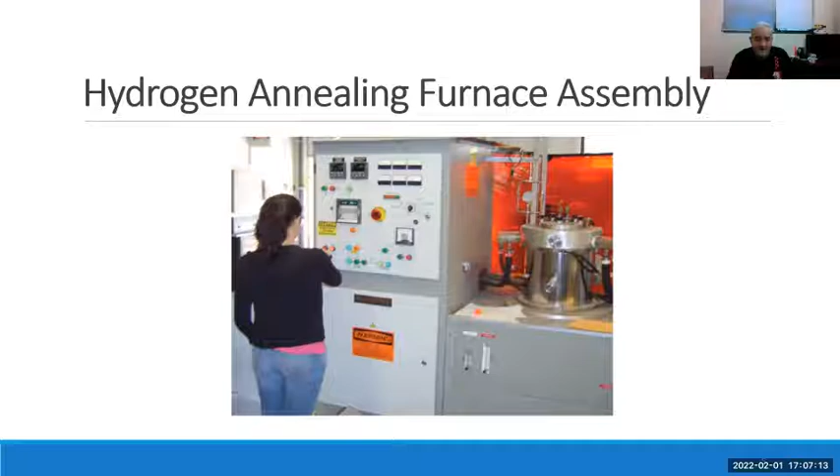And some of the equipment that we have, which I think not many universities in the world have, is a hydrogen annealing assembly. This furnace can go up to 2000 degrees centigrade, not Fahrenheit, centigrade. And we use it for annealing rhenium, which is used in rocket nozzles, and any of the expensive refractory metals which need a reducing atmosphere. So this item is not present at other universities. It might be present in industry, like the rhenium industry or other industries with high temperature applications. But I got this from the NSF, National Science Foundation, and it's a very important piece of equipment.

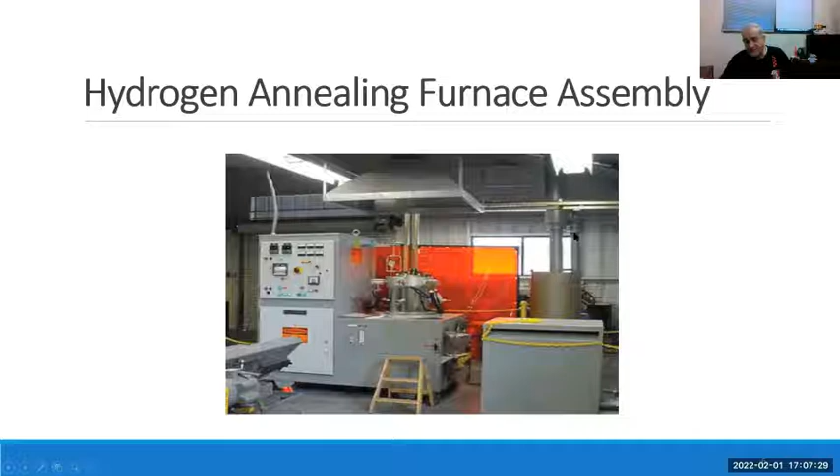This is another view of it. This is the hydrogen furnace, and these are hoods and connections. Actually, there is a small building beside the tin shed area, beside our design center, just built to operate this furnace.

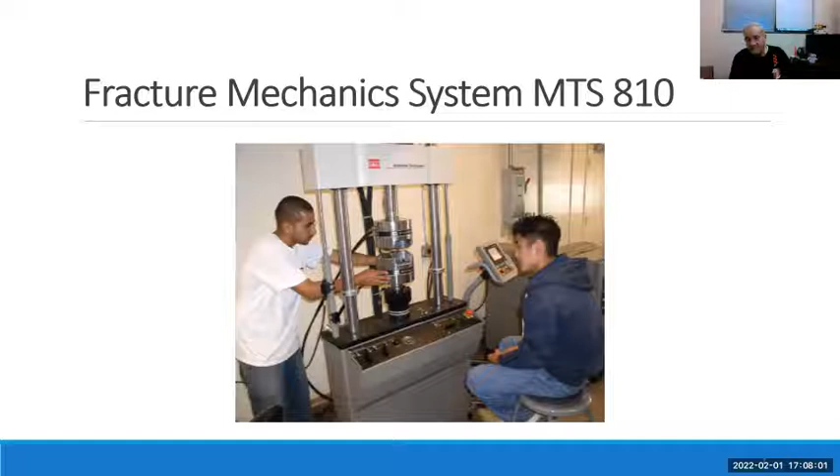Another machine I got from the National Science Foundation, which if you came and worked with us you hopefully will work on, is a fracture mechanics system. We can do here fracture toughness, high cycle fatigue, low cycle fatigue, fatigue crack propagation, stress corrosion. It's a very important machine, and we did lots of work on it, but we can still do much more work.

I published with the graduates and the undergraduates over 200 refereed journal and conference proceeding publications. I supervised over 50 MS theses in these years, and every thesis was published in a journal, except one which was published in a conference proceedings, which was refereed as well. I also delivered several keynote speeches and plenary lectures at international conferences.

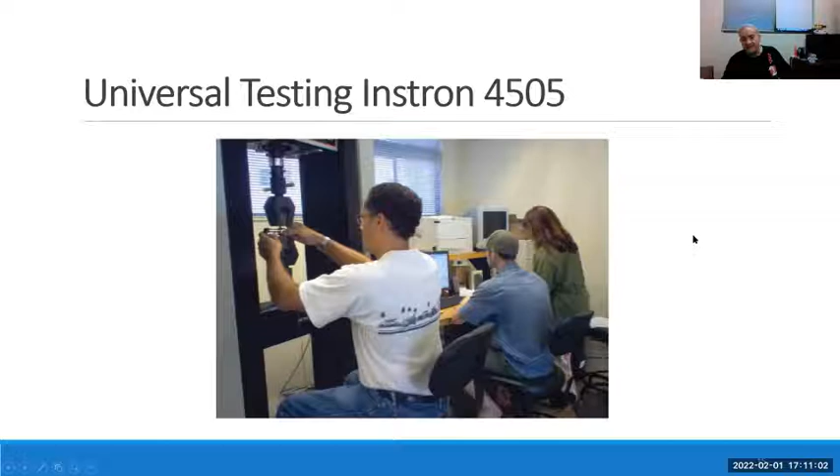This is one of the machines we got from the National Science Foundation. It's called the Universal Testing Instron 4505. It's universal because here we're doing tension. If you remove the grips, you do compression, you do 3-point bending, you do 4-point bending. So that's why we call it universal.

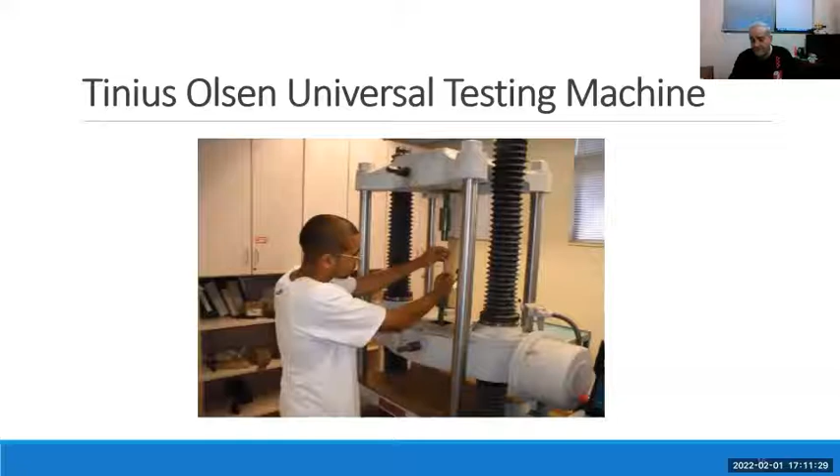This is another machine called Tinius Olsen. We use it for tension and compression, and this is for heavy duty. It has 120 kips force. The previous one has 22 kips, but this one has a 120,000 pounds capability. This is another one with 22 kips. We got it as a donation from Aerospace Corporation. We use it for composites.

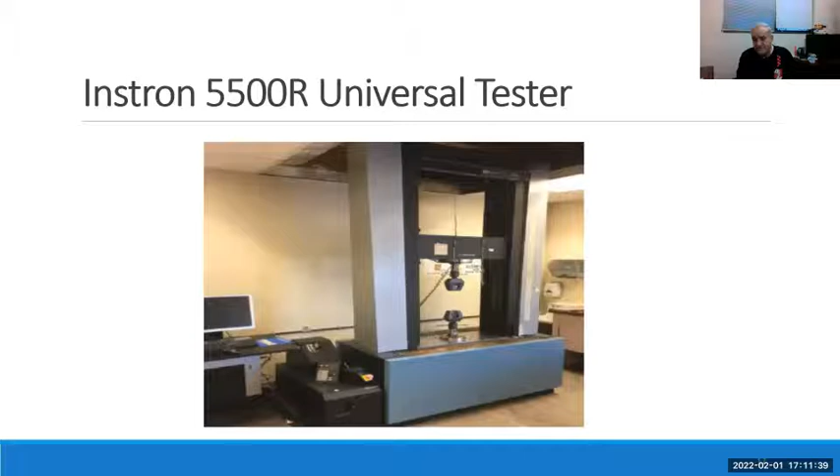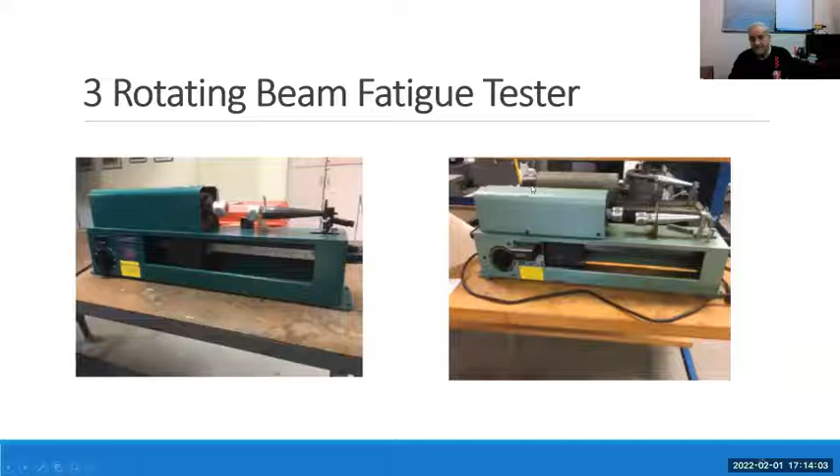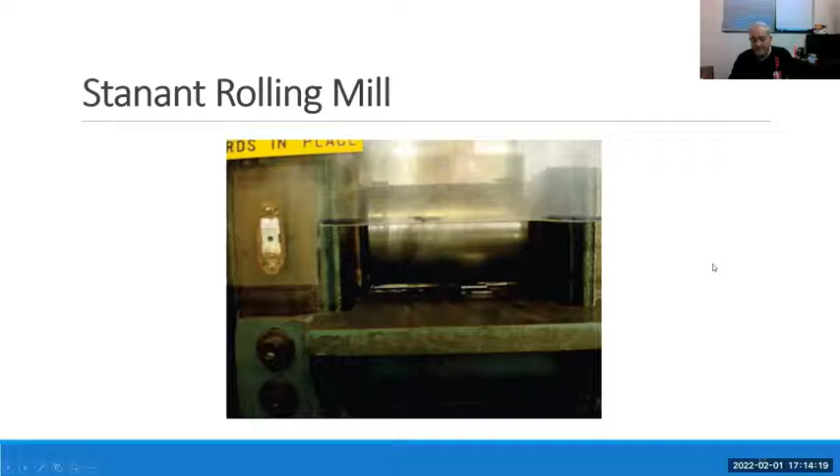And these are some of the machines we're using for the theses. This is the 3 rotating beam fatigue tester. We're using also a lathe to machine the samples. I said that Sultan did in his thesis ductility of magnesium. He was using a rolling mill and furnaces and tensile testing.

And currently, I have 3 students doing their MS theses with me, and it is on additive manufacturing. The first one, his name is Ivan Del Castello. His thesis is on the effect of thermal exposure on the mechanical properties of aluminum alloy, AlSi10Mg, fabricated by laser powder bed fusion. And here we're looking at components which are manufactured by additive manufacturing to see how strong they will be after 100-hour operation, 500-hour operation, 1,000 hours operation, if they're going to stay intact or if they are going to lose strength.

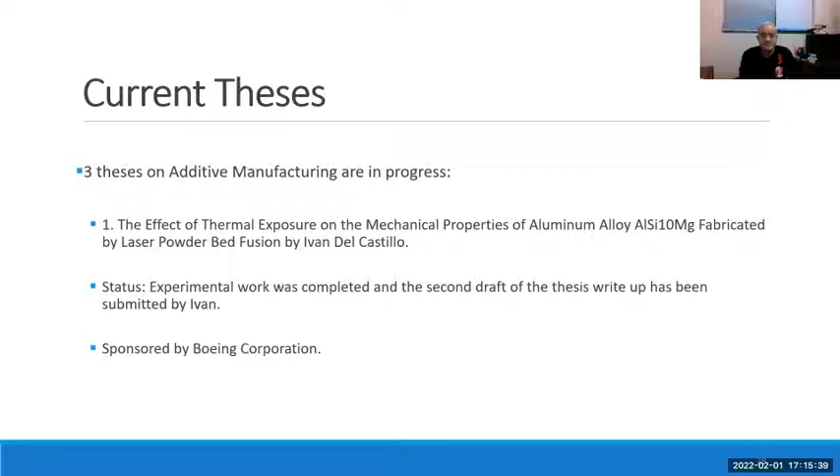So the experimental work was done, and in December 2021, he defended his thesis, but now we're in the second draft of his thesis. We're looking at it, and if the 3 committee members, myself and 2 other professors, are happy with the draft, then he's going to graduate. And this work is sponsored by Boeing.

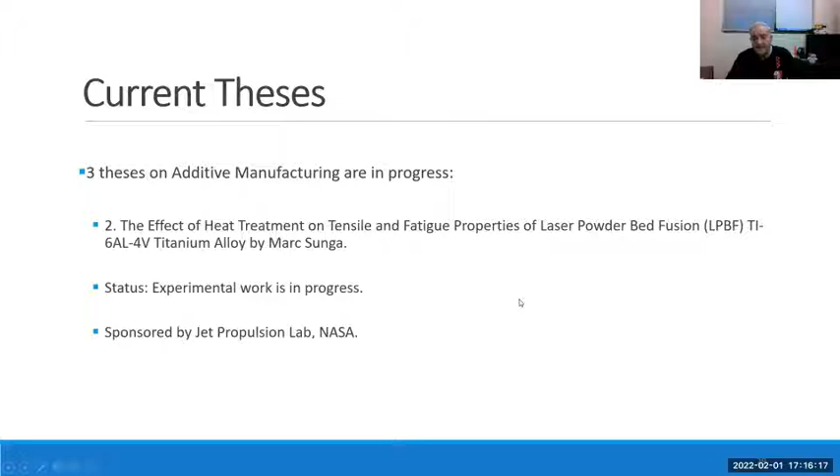The second thesis is sponsored by the JPL, Jet Propulsion Lab in NASA, and it is on the effect of something we call hipping, hot isostatic pressing, and annealing temperatures on tensile and fatigue properties of laser powder bed fusion titanium 6 aluminum 4 vanadium alloy. The student's name is Marc Sunga. He's in the middle of the experimental work, and hopefully he's going to graduate sometime at the end of summer.

And the third thesis really started a month back. The student, his name is Nick Osborne, and the thesis again is sponsored by Boeing Corporation, and it is checking on how we are producing additive manufacturing materials. We're trying to see if we can build it and then make it stronger before we put it in applications. So we're trying to do some heat treatments to make the material stronger, and we're going to check the microstructure and the mechanical strength of different overaging treatments on it.

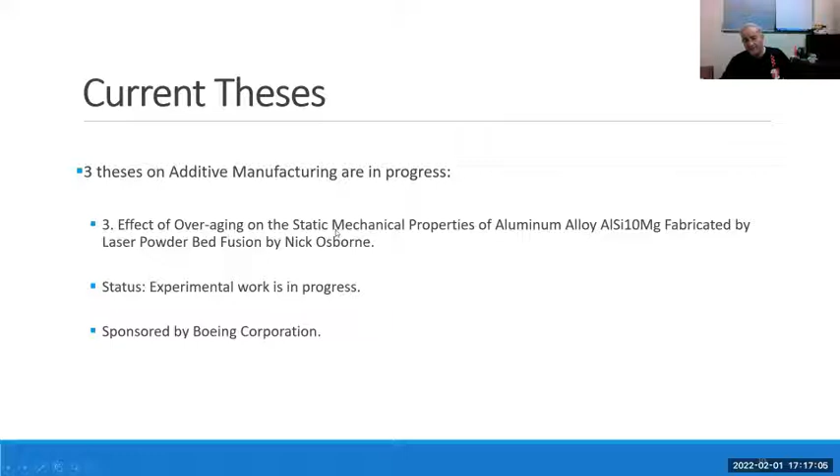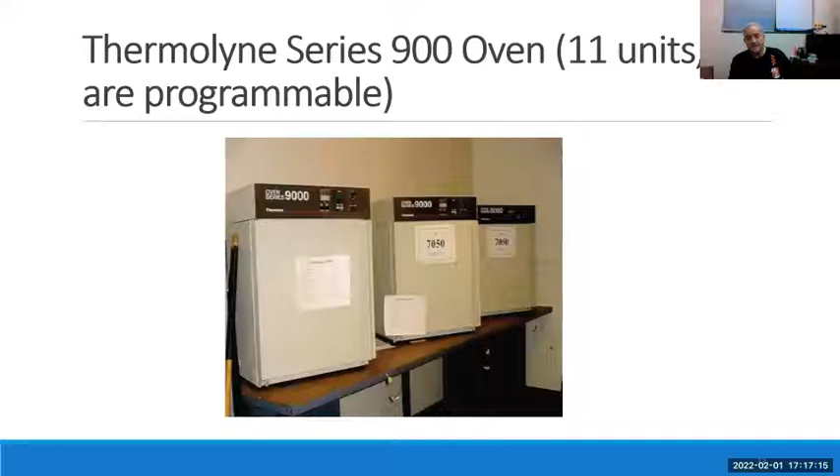So we're using in the theses furnaces. We have 6 of these furnaces. We have 11 ovens, and we have electro-discharge machining units. You know, if you have a lathe or any other classical milling machine, you produce debris, powder, debris. This machine has a wire. If you program it, the wire will produce a discharge, and that discharge is going to cut the sample in a perfect dimension without a single drop of debris.

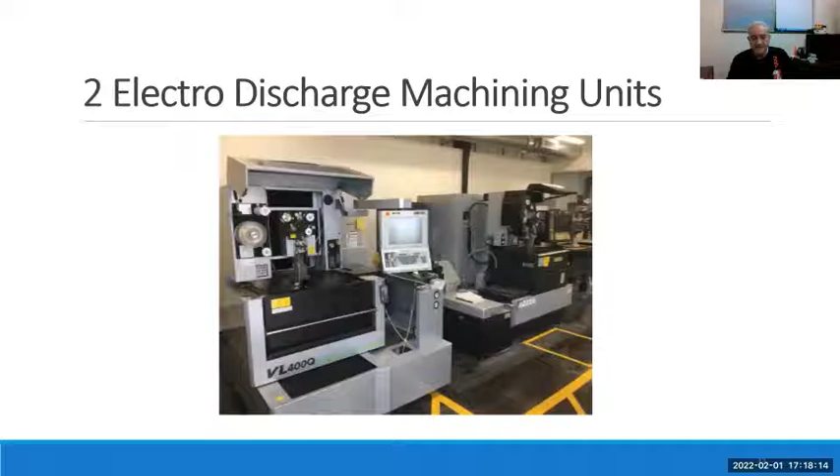So we have 2 of these machines. The first one, the old one, I got it from the National Science Foundation. The second one, the university was kind and they bought it for me. But we machine most of the critical samples on the electro-discharge machining unit. No debris, excellent precision, and we use it all the time.

Also, we use a scanning electron microscope. Actually, this is in the Life Science building across the street. Dr. Young John Lee, he operates the microscope, and he has the students learn it and use it. After you fracture a sample, you look at the surface to detect if the fracture was brittle or ductile or a mixed mode.

Also, we use our optical microscope to check the internal structure at 500 times magnification at different stages in the heat treatment: the as built, the as softened, as strengthened. So the optical microscope is a very important tool.

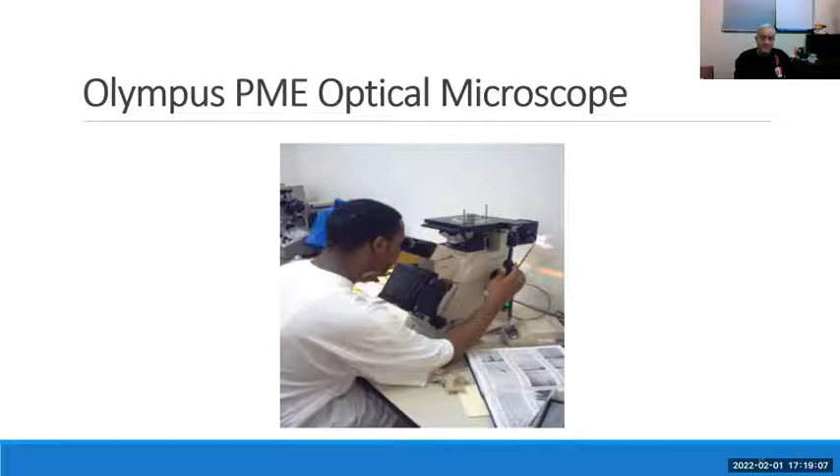In the future, I have now a proposal from Boeing. They have 4 projects that they would like to do with us on additive manufacturing. And Aerospace Corporation, they submitted 3 projects that they would like to do with us on additive manufacturing.

Additive manufacturing is a new concept. Before, you used to produce a block and cut it and drill holes and machine it until you make a component. These days, additive manufacturing is building the final product layer by layer, and we call the old technology subtractive manufacturing and the new technology additive, because by going layer by layer, you create the final product. So that's why we've been hot on the subject lately.

The last thing is we're trying in the graduate program, hopefully by next fall, to add a certificate in additive manufacturing and a certificate in material science. So if you take 3 courses in additive manufacturing, other than your master's degree, you get a separate certificate saying you have a specialization in it, and the same for material science. That's it, if you have any questions for me.